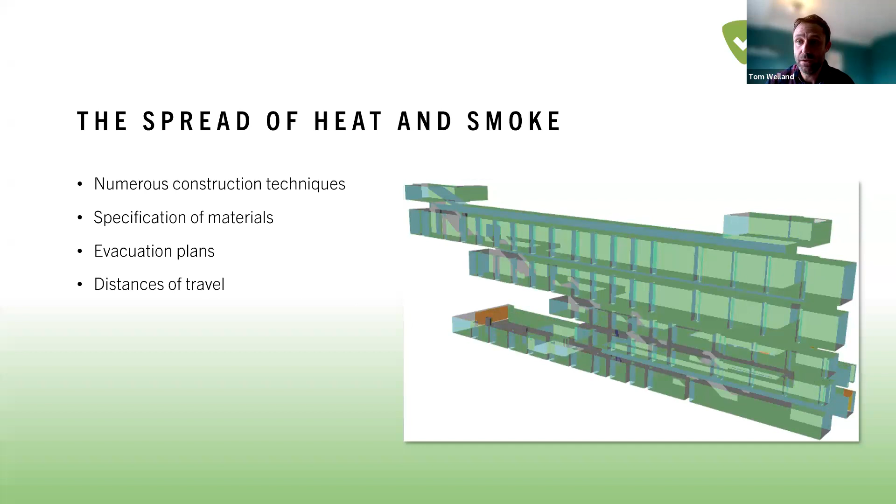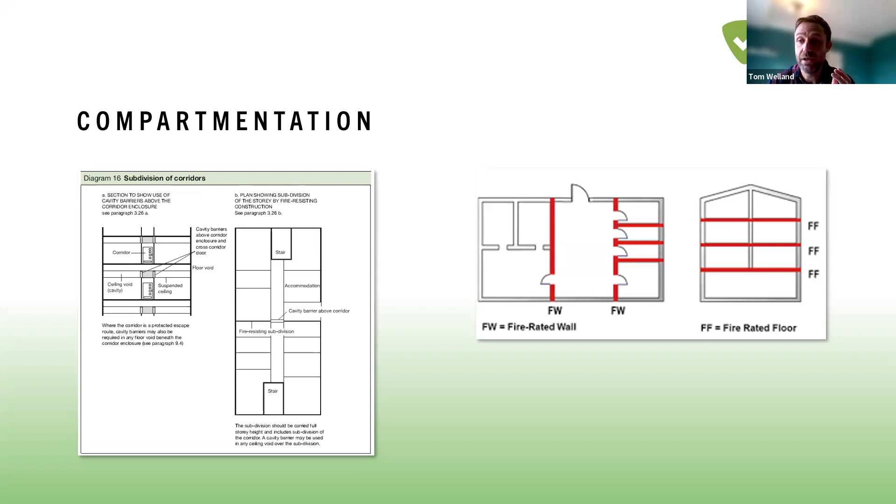We look at the compartmentation of the walls and floors, and it's built perfectly. So providing it's constructed well, using the right materials and the right quality of workmanship, the premises we're looking at should maintain effective means of escape. The egress should be safe, and people should be able to stay in their compartments for a period of time.

What stops the plan actually working? It's not men, I will say that. It's various people. Once a building's built, it becomes dangerous when people occupy it. So you might get an IT company, or a Sky person coming in and putting cables through the building, punching through compartment lines.

You might find various workmen, you might find damage to the building. This can all put holes inside compartmentation, so the spread of fire and smoke gets out, it goes away from the plan. So from your shoe boxes, they've all of a sudden got lots of holes in them. And that's what we're trying to mitigate against, that's what we're trying to think about.

So the biggest issue we've got, the biggest hole in those shoe boxes, is your fire doors. We need fire doors so we can get inside and out of our shoe boxes, but what we're primarily looking for is to keep those doors as effective as possible. So they are your shield.

It's a good illustration here - have a well-fitted fire door. You can see behind that door the absolute devastation that a fire's caused, but on the other side, the paint is still absolutely fine. The other side of that door is basically providing an effective means of escape. So people can walk past that door with a big fire raging behind it, and it's perfect.

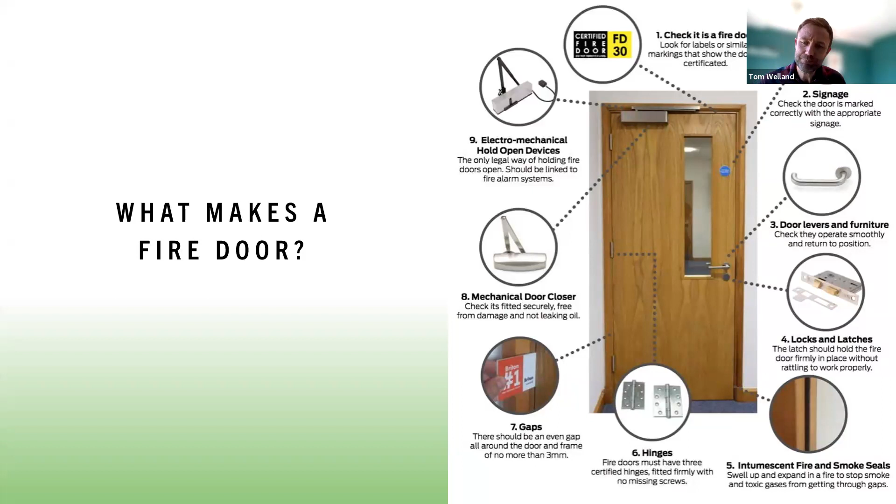The clever part of a fire door really is, as I said, the engineered design of a fire door. So when you look at a fire door and it looks lovely, the actual veneer, the wood on the outside, is the expensive part, I guess. That's what makes it look nice.

But inside, there are millions and millions of little splinters of wood which are held together by intermittent glue. That is your barrier. So when the veneer on the outside cracks and crumbles and goes away, that's not your barrier - it's the sandwich on the inside. That's what's protecting the occupants, that's what's protecting and keeping that means of escape, your shield against the fire.

And we must remember in blocks of flats, what we are actually trying to do is think that there's a fire in someone's flat and they've left the flat - does the door close behind them? That's your barrier. That's what we're trying to do, to make sure the other occupants of the building can walk past that flat that's on fire and they are safe for a period of time.

So what does the law say about this? The law, if we're talking just in England and Wales, is the Fire Safety Order. It requires that in a block of flats there are suitable fire precautions so the common parts are safe as a means of escape from fire.

Under Article 9 of the Fire Safety Order, a risk assessment shall identify fire doors and determine whether they adequately resist the spread of fire and smoke into or within the common parts. This is the actual article you'd be prosecuted under if you were contravening the law.

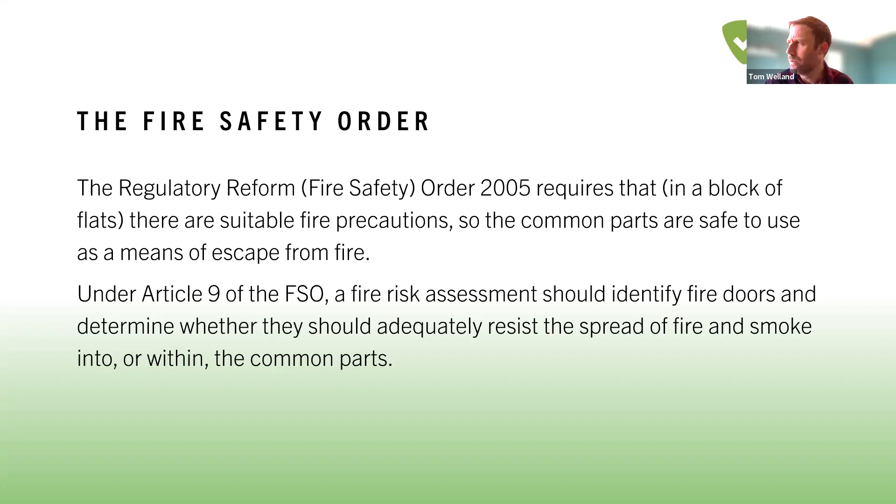It doesn't mean you have to have newly tested certificates and things like that. You have to put the case forward if you're deviating away from a British standard, but it doesn't mean you're breaking the law because you don't have all the components that you'd require if you were installing a modern, brand new fire door.

Following from Grenfell, we have the Fire Safety England Regulations. They came into force in January '23 and implement all of the recommendations made to the government in the Grenfell Tower Inquiry. This is where Regulation 10, the frequency of inspections, and requirements around fire doors come in, along with a bit more guidance around exactly what we've learned.

I think certainly in the UK we've been quite good at learning when we have a fire. If we go back to the Rose Park care home fire, lots of fire doors were evident in that. I think BRE made a whole-scale replica of that building and burnt it, and we learned a lot about that. An awful lot of money and time has been spent understanding how to make our premises safer when we unfortunately do have a fire.

So we're going to focus on Regulation 10. It applies to all blocks of flats that incorporate common parts, regardless of whether that block is purpose-built or a conversion. For the purpose of this legislation, flat entrance doors are included within the common parts.

That's important because the Fire Safety Order is a commercial law. So the flat entrance doors are deemed to be a common part, meaning you would come under commercial law.

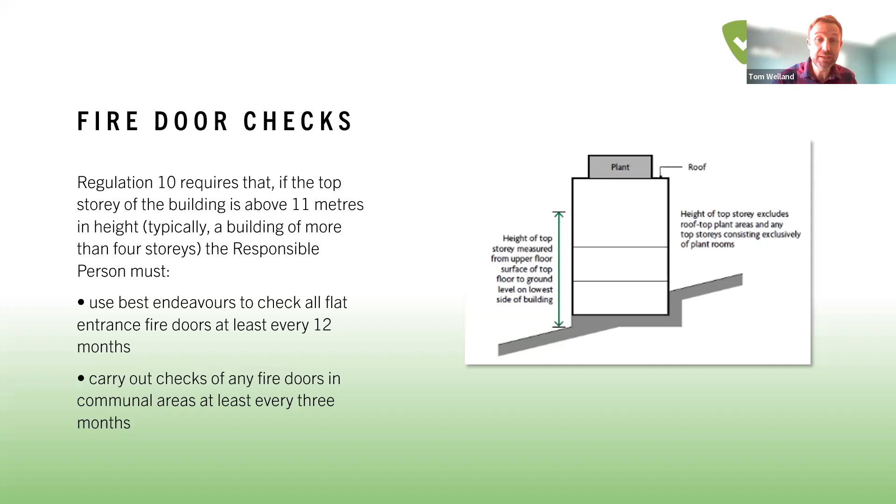So fire door checks, identification of issues in relation to the type of door and its intended fire resistance or resistance to fire and smoke is a matter for your fire risk assessment and compliance with the fire safety order. It is not a matter for Regulation 10 of the Fire Safety England Regulations 2022.

So it's important to put these because I think I'm always concerned about with legislation change, there is a massive economic growth in certain sectors. So you will all see, if you've been on LinkedIn, there's the massive resurgence of fire door inspectors and this industry, and telling you need to do that, it's dangerous, and it's ambulance chasing.

Yes, there is a greater requirement. Yes, companies will seek to get assistance in doing that. That's absolutely fine. But it's important to note what their scope, what their remit is actually there to do. It shouldn't be go through a building, find every single fault relating to an installation standard, and require remedials off the back of that.

I've also seen an awful lot of companies which are working alongside a remedial company. So it turns out your door inspector's been in and they've produced you a big report. It's all very scary and it's got fail written all over it. But rather handily, they can introduce you to another company who can put all that right. I'd really be concerned about that.

But I think the point I want to get across in this presentation is there has been no assessment of the risk. There's been an assessment based on a British standard around installation of fire doors. That's fine. Give that information back to your fire risk assessor. Understand what that risk is. Go back to your door assessor and say, okay, that's fine, we've found an issue, we've found a fault. What does that mean for life safety within the property? What does that mean for maintaining an effective means of escape? And it's not a case that you have to make every single building a prime perfect example.

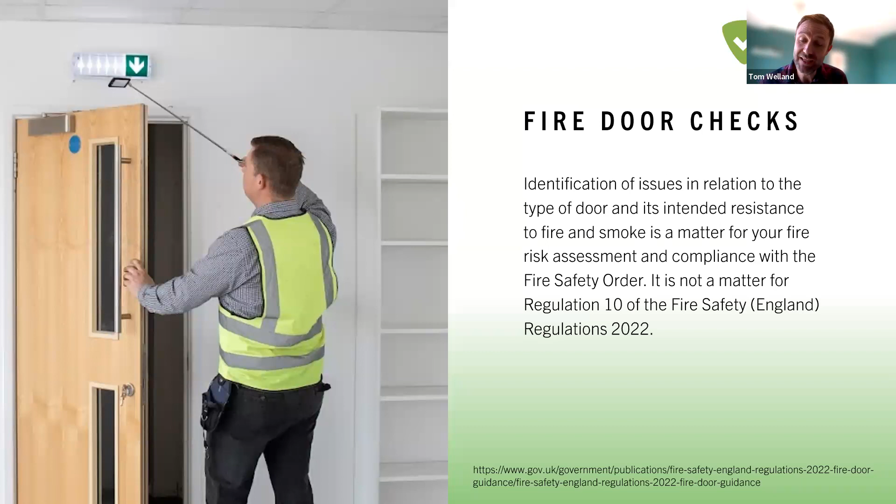If the fire safety order was all about every building being the safest it can possibly be, there'd be a massive push for sprinklers in every single block of flats. We're not going to take it that far. So it's important to note that not every issue you find must be remediated. There must be an assessment of that risk.

The types of fire door checks: we carry out something like a pre-occupation survey, which is where a developer—basically it's snagging list time. So before it's handed over to the eventual owner or the housing association, it's a pre-occupation survey. At that point, we really go to town on inspecting that fire door and making sure it's a perfect example of a brand new fire door installation.

You would carry out a fire door assessment as part of your annual fire risk assessment. You can carry out a non-destructive fire door assessment—that's perhaps where you feel you've got specific issues around the doors and want to have a look. That would be fairly detailed. You can take it to the next step, which would be a destructive fire door assessment, typically part of a Type 4 risk assessment.

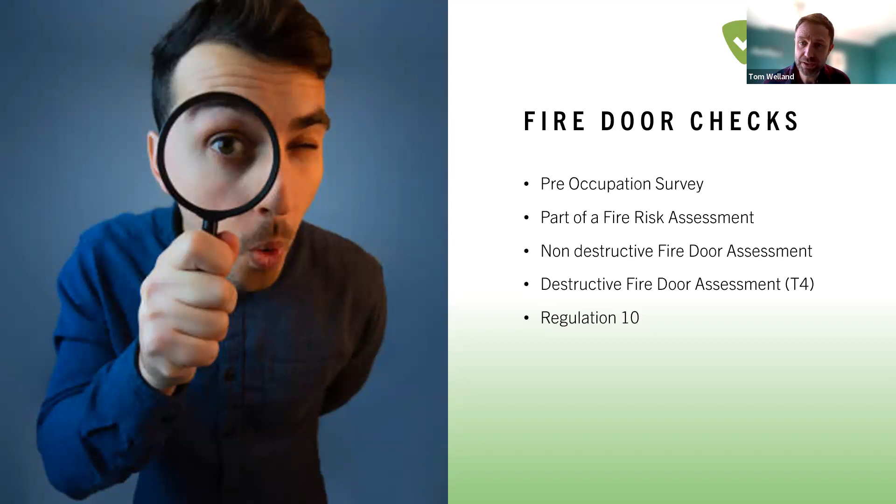That's where we would break off parts of the architrave and really go to town on the door. We've carried out some samples where we've removed doors and sent them away for further testing, as part of a Regulation 10 check. So as part of a Regulation 10 check, what should be being looked at?

Number one, does it close? If the door we're looking at is—in theory it's taken off and sent to a lab and we test it and it doesn't actually do 30 minutes anymore, it does 23 minutes—are you really going to lose any sleep over it because it's 23 minutes in a furnace? I don't know, it depends on the situation. It depends on the age, how agile the occupants are, where that fire door is in the building. But really, what I'm most concerned about is, does it close?

So is that door closer working like it's required to do? You want to ensure the self-closer is correctly installed, not broken or disengaged. Sometimes you'll see a little bit of fluid stain underneath it—that's hydraulic liquid leaking, and that's a good sign it's going to break after a while. Is it closing too fast? Is it closing too hard? These are things to look for the root cause.

If someone's disengaged that closer, there's a good chance it was just too strong for them. Most door closers these days come with adjustments—an adjustment for the swing speed, and an adjustment for the latching speed. So you can have the swing speed really quite slow and controlled. The latching speed, which is the last 15 degrees or so, should have more of a kick to it so it can overcome a latch.

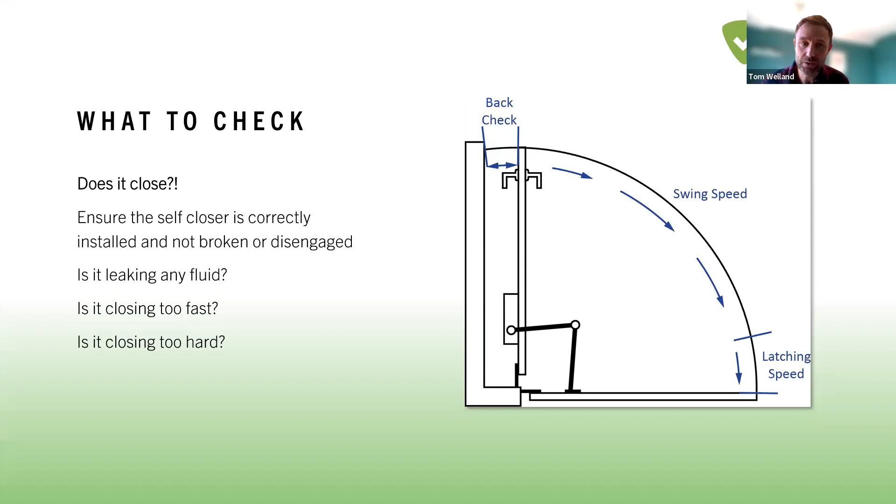Is there any damage to the door or the frame? If we go back to our example—well, actually, we've got the nice wood veneer on the outside and the intermittent glue—once we start getting holes like this, you're going to have problems. Your seal has some risks, and heat and smoke can get to the other side of that door and effectively can buckle that door.

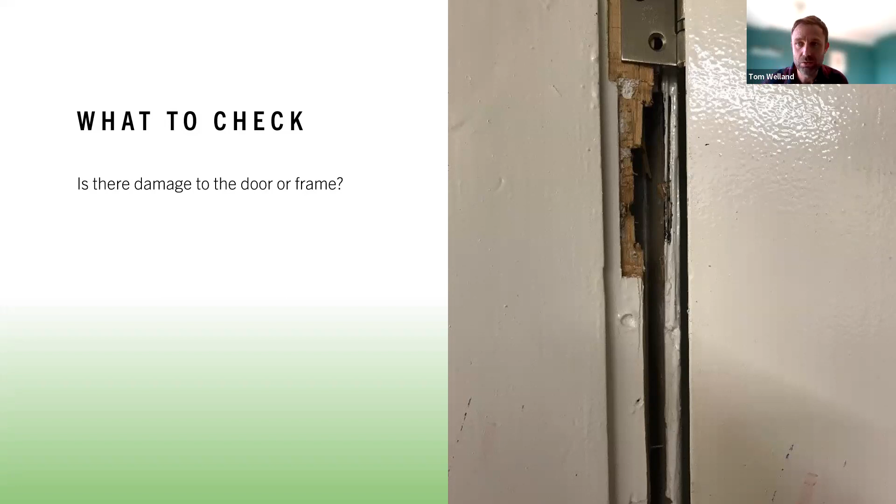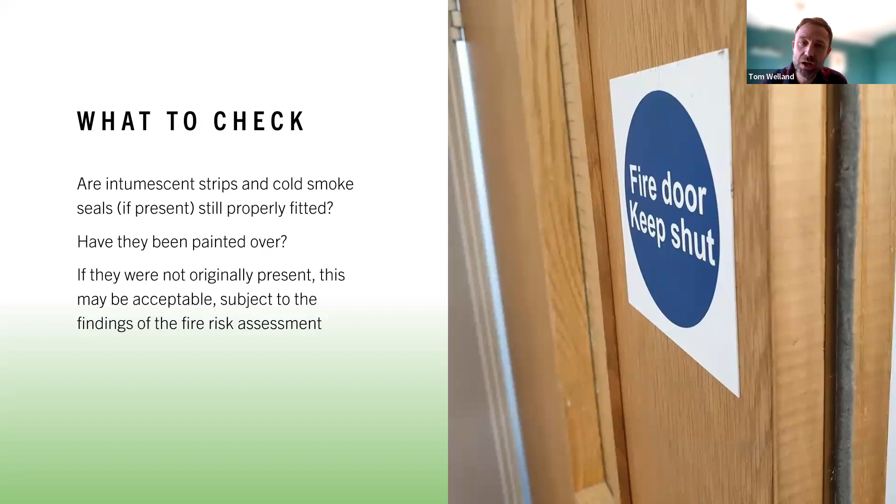Are intumescent strips and cold smoke seals properly fitted? Have they been painted over? That's quite a common one. If they were not originally present, this may be acceptable, subject to the findings of your fire risk assessment. And I will keep trying to bring us back to, what does the fire risk assessment say about this? A door assessment is a spot check, and you're assessing it against guidance—the guidance we're looking at is installation guidance. That fire door is not being installed properly. So we can gather all that evidence, and then there must be an assessment of the risk.

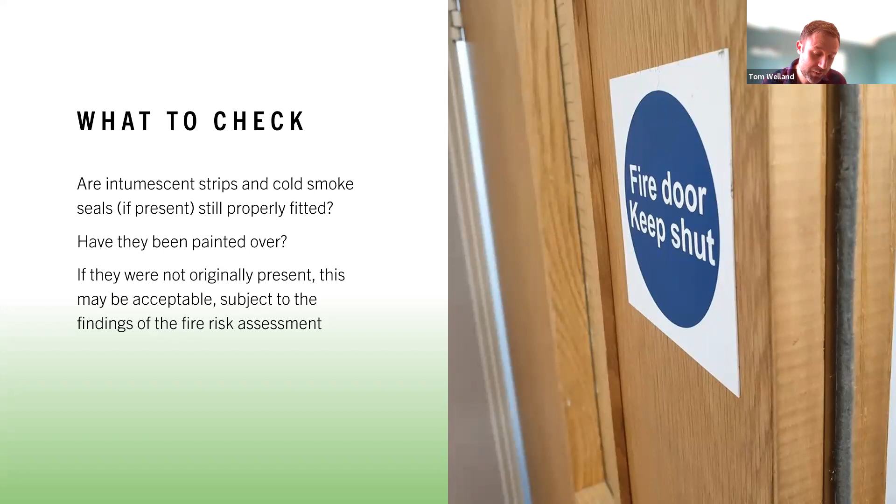Pass it back to the fire risk assessment.

Are the gaps excessive? The industry standard is that gap size should never be more than 4 mil, except at the bottom of a fire door, where the gap should be as small as practicable, while ensuring the door is unlikely to snag on the floor, even if it drops slightly on the hinges. Heat and smoke rise, so the top of the door is our main concern. Smoke can get underneath too, but how large is the block of flats, where is that door located, and how long will the means of escape remain tenable?

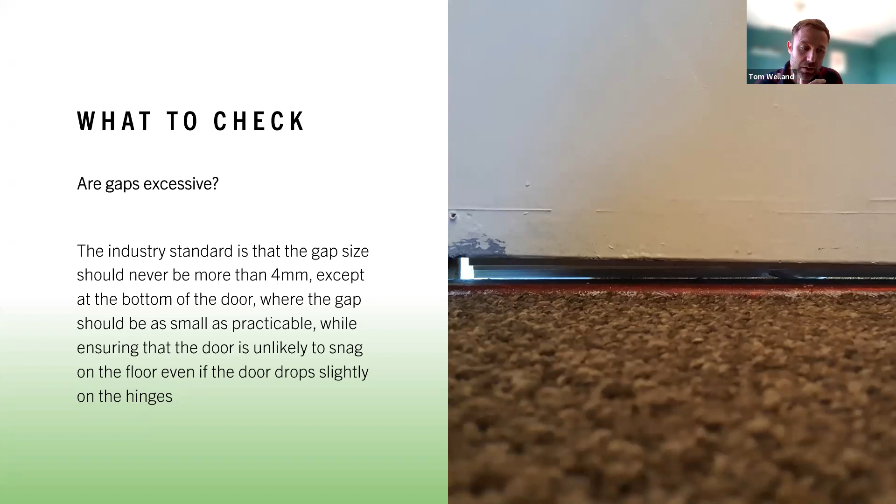I went off on a bit of a tangent, wondering what tolerances are required throughout the rest of the world. Looking at the threshold gap at the bottom of the door, there's a big difference in what countries actually require, even though these are the same fire doors. A lot of fire doors are made in Taiwan as blanks, then shipped all over the world and installed by installation companies, all required to do the same job.

In America, the threshold gap can be no more than 19 mil. Australia is 10 mil, Hong Kong 10 mil, New Zealand 10 to 25 mil, and Dubai or the UAE is 13 mil. Same humans, same buildings, yet the tolerances are really different. What we should actually be focused on is that 4 mil gap — that seems to be the common recurring theme around the edges and top of the door.

Hinges — are they in good working order, with no obvious defects? There should be three hinges, and they should be CE marked. Failure to have three hinges — what does the risk assessment say against that? If you're doing an installation, yes, you must have three hinges and they should be CE marked. But if a door in situ doesn't have three hinges, it doesn't mean you're breaking the law. It's against a code of practice, guidance, or British standard, but it doesn't mean you'd be prosecuted just for not having three hinges.

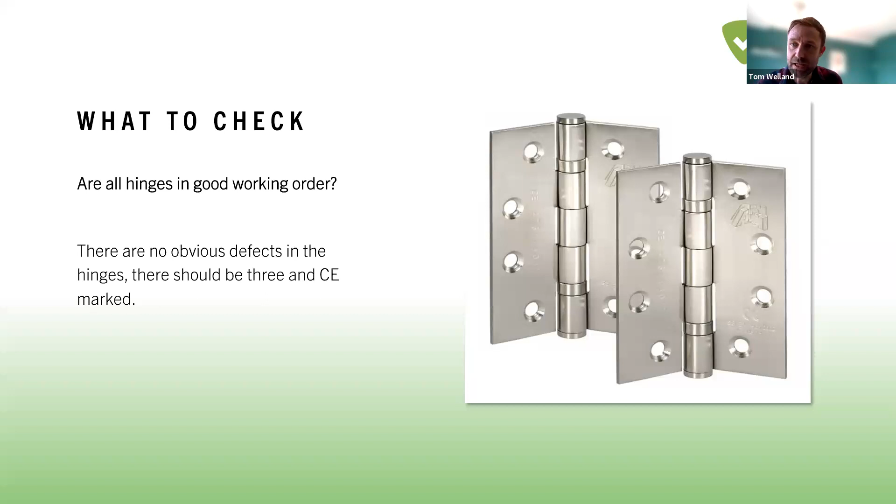Is that door maintaining an effective means of escape? Again, assess the risk that's in front of you.

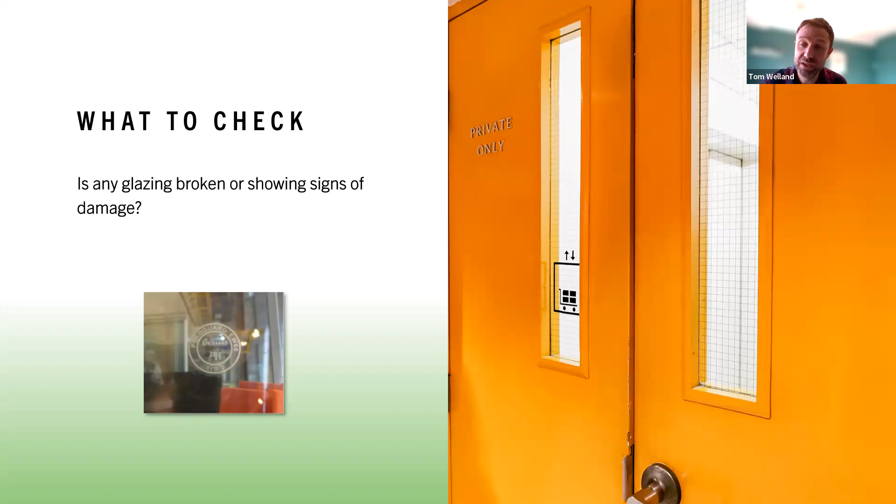Is the glazing broken or showing signs of damage? Georgian wire glass is easy to identify as fire resistant by the lines on it — a good indication the door was manufactured to be fire resistant. With clear glazing, you'll often see a sign, bottom left, giving a number that's easily Googleable, telling you the required level of fire resistance. Sometimes it's security glass, which has a limited but still present level of fire resistance.

Sometimes you'll also find TRADA plugs — little coloured plugs with arrows, which a lot of people call Christmas trees — that give information on the relevant fire resistance of the fire door.

What happens when you... Sorry, Adam, do you want to say? There's a couple of questions.

One about flat doors - a door is no longer compliant because the manufacturer has withdrawn it. I assume it's one of these composite doors. What would somebody do then, especially if the passive fire company that installed it is no longer accepting liability to remediate it?

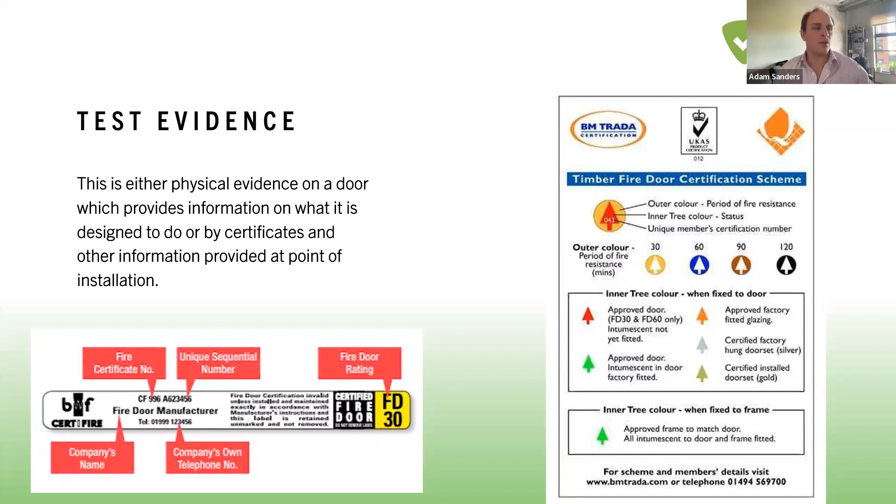And what about looking at threshold gaps? BS 8214 says 3 mil on a threshold gap for smoke control doors. Is it worth trying to explain to people the difference between just a fire door and a smoke control door, and why that 3 mil versus the 10 mil becomes important?

Yeah, so if we take it back to the actual design of the building and the smoke control - what we're looking for if there's a fire is what's happening with the smoke inside those buildings. So you'd have equipment like AOVs, automatic opening vents, which will lead the smoke through the building and out of the building.

So there are doors that also play a role in that, which is important to note - the fire risk assessor should be well aware of what that door's requirement is. So if there are any issues with that door, it heightens the need for remedial action. It places more importance on that door if it's part of a smoke control system. It's important that it's actually going to do its job when it's required to.

But you may find that a fire door assessor is looking at the fire door and seeing all the precautions and applying the point of guidance, but actually, are they aware of what that fire door is there to do? What's its role? I think it's important that...

There was a case a while ago where a certain company was prosecuted all around compartmentation around fire doors, but 2 of those doors that were cited weren't actually required to be fire doors. So effectively, when you're looking at gaps, things like that, it doesn't matter - you can have a big whacking great hole in it. But sometimes when there's construction, they just put fire doors in as many places as possible.

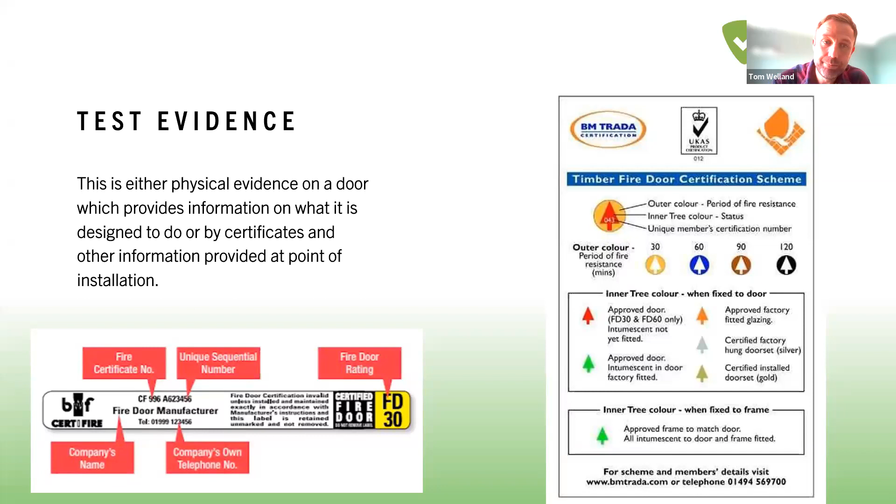Notional doors or nominal doors - this is generally an older type of door, which could have been in place for many years and met earlier standards for manufacture and test, but it doesn't display any fire test evidence. It's been there for such a long time.

If we would start asking the questions of, okay, where did you get it from? Who installed it? What evidence is there that it's fire resistant? There's nothing. So at that point, we need to analyze what's in front of us - so what's the thickness of that door?

That's a good indication that it's some form of fire resistant. If it has glazing in it, if it has the Georgian wire glass, that's a good indication that it has some level of fire resistance. Give it a good tap - does it sound fairly thick?

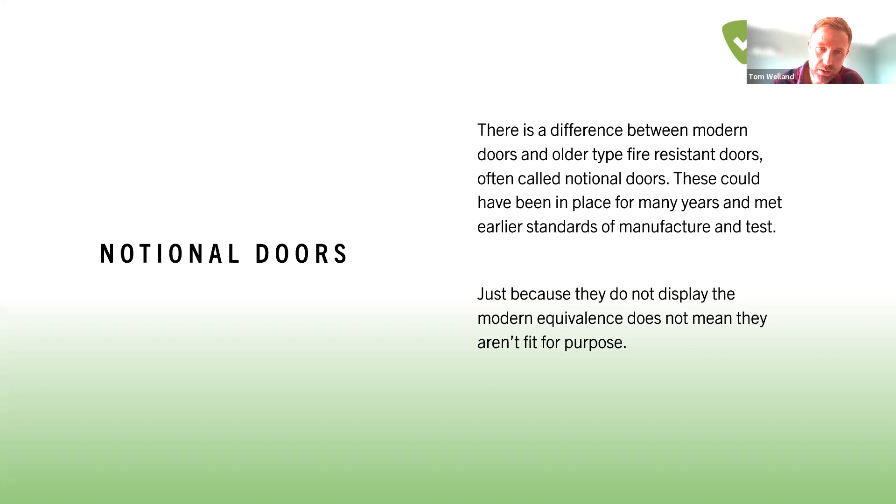If it's a very old door, like the one I mentioned earlier, solid oak, can a risk-assessed approach actually allow that door in situ? I'm always conscious that these are people's homes and we're not trying to make them look like a fire safety shop. So if you have properties which are older and more ornate, do we have to lose every part of the character of that building due to fire safety? Or can we actually look at it?

Is there any remedial action which could upgrade it? Putting on intumescent strips and cold smoke seals is a way of perhaps mitigating that risk. It doesn't mean the door just needs to be removed. Just because they don't display the modern equivalents does not mean they are not fit for purpose. This text here is not my words - it comes directly from British government guidance. So it's important to note this isn't me going off on a tangent, this is what's being told to us.

There's a couple of questions people have asked, especially around notional doors, in conversions or buildings that don't necessarily fall under the requirements of the Fire Safety England regs to have these door checks done. So if you have a building under 11 meters, do we need to keep doing these door checks? And if we come across notional doors, do we need to fit those strips and seals? And if a door surveyor has recommended strips and seals, should that work be done versus the recommendations of a risk assessor? So I haven't made that very clear - if you've got a door surveyor that said fit strips and seals to a notional door, should we be doing that? And what's the difference between a door surveyor recommending it and a risk assessor recommending it?

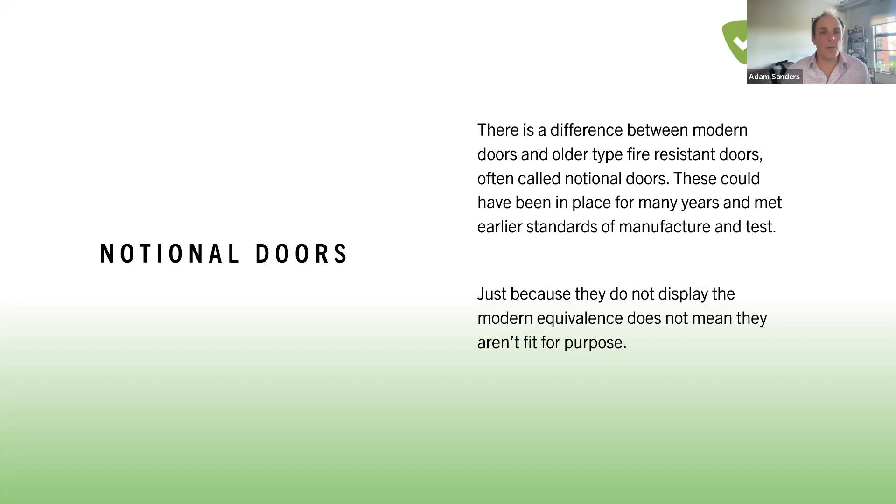It seems to me the red flag really is when you have a door survey with a whole load of notional communal fire doors, and a surveyor comes along and just says fit strips and seals to every single one of these doors without justification, versus maybe specific doors that might need that work done because there's a particular risk. Intermittent strips and cold smoke seals are a relatively low cost improvement to fire safety, so it's fairly easy for people to go, okay, we'll do it, because it's not a lot of money - we're not asking for sprinkler installation. On the face of it, it should improve safety, so we'll do it.

If you look at intumescent strips, the way they work is in a fire test they're installed on doors, and you've got that furnace heat hitting it, constant heat licking the door, which expands the material and it fills the gap around a fire door. Real life fires don't actually work like that, and intumescent strips will only work if they're all activated.

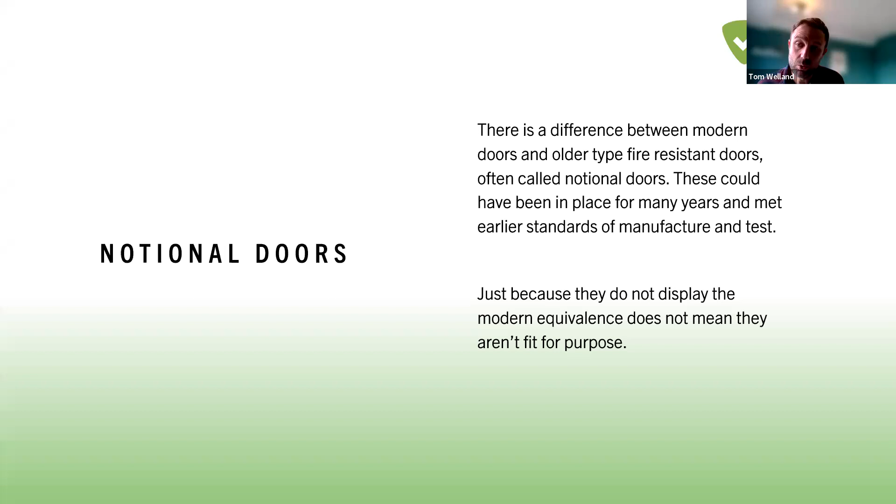So if you have a fire and perhaps the window's open, you can get a problem with constant heat and smoke hitting that door. There are plenty of real life fires where the evidence suggests the intumescent strips haven't actually activated as they should.

So we shouldn't be lulled into thinking that just because you've done that, they are perfect. It's not driving the risk down to a really low level just because you've done that.

I think it's a good bargaining tool if there is real doubt against the doors but you want to keep those doors in, or perhaps your budget is quite low - it's a good argument to say, put intumescent strips on. But to do it properly you need to take the doors off, route out the edges, put them back on, or install the intumescent strips and then re-hang the door.

Who's checking after the joiner's been in and done that? That's the other thing to remember - make sure someone's coming back in and confirming it's been done correctly. But we shouldn't be lulled into thinking that just because intumescent strips are on the door, they are solving all our problems - that we now have an effective means of escape. That doesn't necessarily mean that in all circumstances.

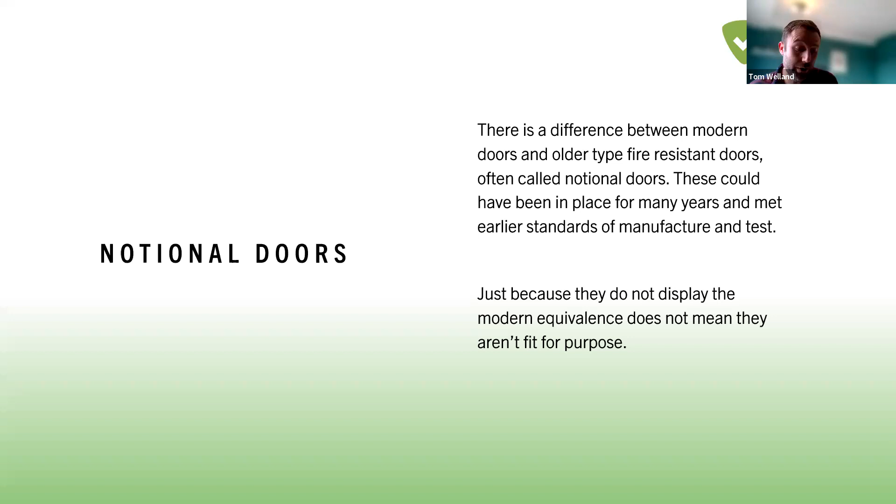So, new door sets compliant with building regulations: guidance in Approved Document B advises that flat entrance door sets should achieve 30+ minutes fire resistance. Older timber doors, manufactured or installed before current fire resistance test standards, may not have achieved this performance if tested to current standards. These doors should still be acceptable if they're in good condition without excessive gaps between the leaf and the frame. Again, these are not my words.

If you guys want to keep this, we can get a PDF copy sent out to people, but this is effectively distilling it. I think this is part of the problem - the market is seizing an opportunity to improve fire safety within blocks of flats, but also a lot of work is being carried out almost needlessly, just because of the fear of fire, so there's an opportunity to make money from it.

I quite wanted to stand on a bit of a soapbox and say, can we just actually look at what is the overall objective of this? The overall objective is that we have a higher frequency of checks.

So if there is damage to fire doors, it's picked up quicker. It doesn't mean to say that all of these fire doors require remedial action - that's not what is in the guidance, that's not what is meant by these checks. It means that if there is significant damage, it's picked up quicker, or if the door closer is disengaged. It doesn't mean let's all go off and remediate every flat entrance door there is - that's not what's required, that's not what the government is asking you to do.

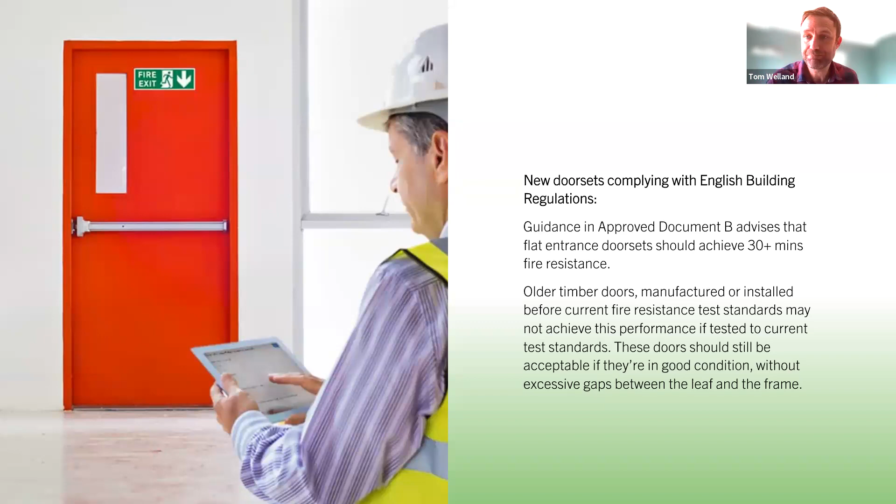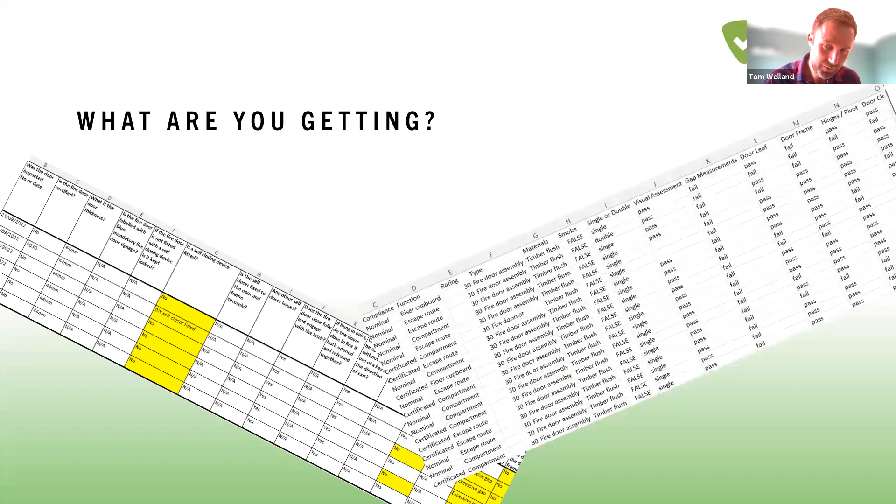So what are you getting at the end of your fire door assessment? These are two bona fide reports. I'm often sent reports and asked, what do you think of this? What's it actually telling you? Is it passing or is it failing? Passing or failing what? The law isn't a pass or a fail.

I think with assessments like this, it's very hard to determine - there is no appraisal, there's no assessment of the risk. It's a very binary approach, which is fine if you're using that to collate information - here's all the information we've got. Okay, then where's your assessment of the risk?

So it would fail an installation standard if we're installing the door today - well, that's okay, every notional door would fail. But what are you actually telling me? Where is this guidance pointing? It shouldn't just be, here we go, it's failed. Language like that is very emotive, and it's not telling the responsible person anything. It's actually driving them into going, oh Christ, I've got to do something about that. Where is the commentary? Where's the assessment of that risk?

I think it's really important to push back and ask questions. People are paying an awful lot of money for door inspections, so there should be an assessment of that risk. This data should almost just be for them, coming down to: we've checked all these doors, these doors were in a category we're okay with, that data is safe. However, these doors, we find there's issues because of these reasons.

We don't think it's maintaining an effective means of escape because of this. So at this point, these are bona fide headlines - three quarters of fire door inspections fail. If three quarters of fire doors are failing inspections, doesn't that mean we're very likely applying the wrong level of standards? If the MOT checks all of a sudden changed and three quarters of our cars failed, I think we'd look at it and go, well, perhaps we're applying the wrong methodology.

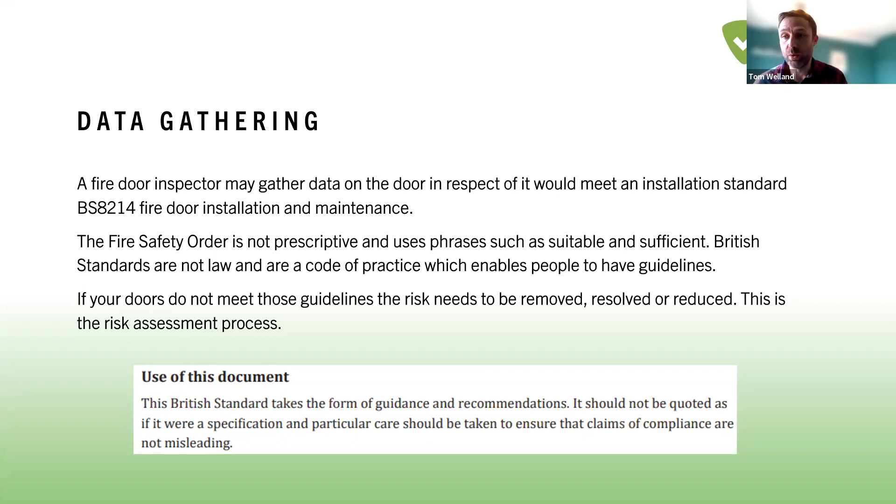A British standard, like I said, is a point of guidance, a point of reference. And if your door assessor is blindly applying it like it's the law, they're wrong. They can use it to inform their decisions, inform their guidance to you, but it is not a pass or fail based on an installation standard - unless they are brand new installed doors, and at that point you would use that standard to the nth degree.

So whilst door surveyors will survey a door to installation standards, the British standard doesn't have much say on the re-inspection other than to check for damage and excessive bowing or deformation. That's effectively where it comes down to - that's what the British standard says in terms of, when you go and look at it, check what's happening. Is there any structural damage? Is there excessive bowing or deformation?

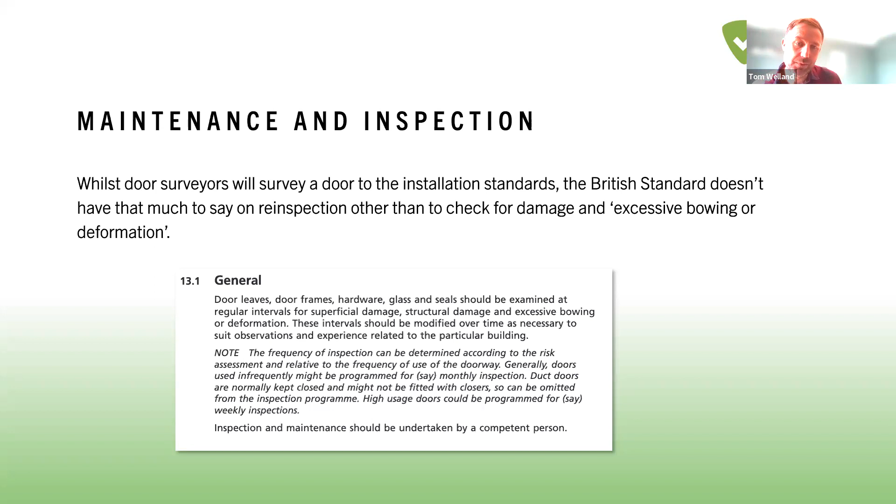Really a door should be put in and it should last a decent period of time - I think it's around 15 years. I did ask some door manufacturers a while ago. It all depends on the type of door closer that's been put in, whether they have fire door retainers, the heat of the building, and all these types of things. But doors are living, breathing things, so they can warp, they can bow - those are the things we're concerned about.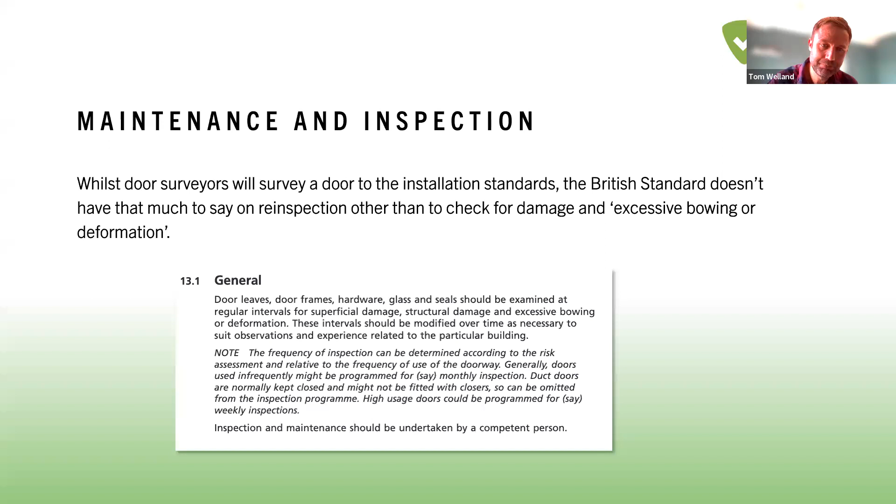So what then should happen? Gather the information relating to the testing and the state of the door, and provide an assessment of the risk. Get your data gathering done. I'm not saying all that data isn't important and we should go off on a tangent and do a big holistic appraisal - that's not what I'm saying. Gather that information and then make an assessment of the risk that's in front of you.

Consult with your fire risk assessor if it's not the same competent person. Decide between all of you what is suitable in the circumstances of the case. If remedial action is required, use third-party accredited companies, but also address the root cause of the issue.

Like when I said earlier about self-closers, there's no point just going, well, we've put the arm back on, there we go, the problem's gone away. The problem is the door's too heavy for the occupant, and they're going to end up doing that again. Or perhaps in that block, people are sick and tired of those doors slamming - can the door closer be adjusted? That's the problem. Then record all the actions and data gathered.

So when you do a re-inspection, is that all still applicable? Does it still provide the job that I need it to do? Adam, do you want to talk a little bit more about that?

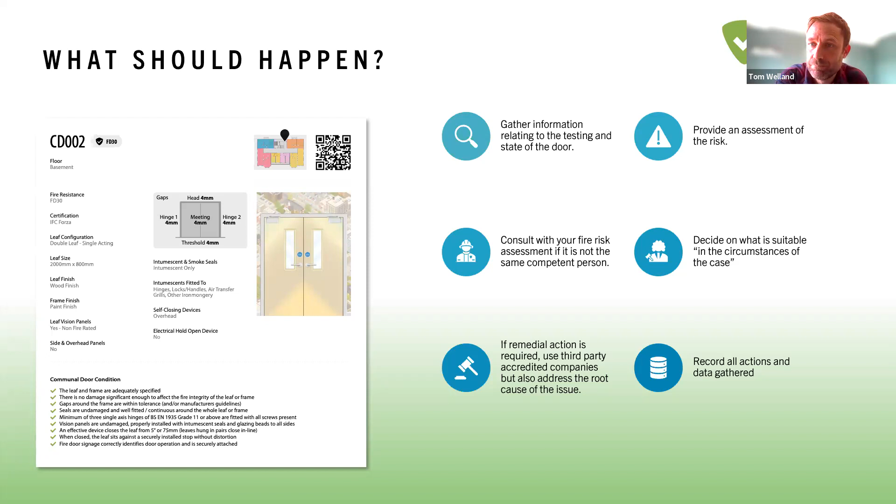Cool, I think it can get quite tricky at that point. Yeah, and I think a lot of the time, if the door is certified and tested, it's on the door - there are plugs on the door as well as the labels. I think from a technical perspective, we've covered pretty much everything. You've got one more slide, haven't you?

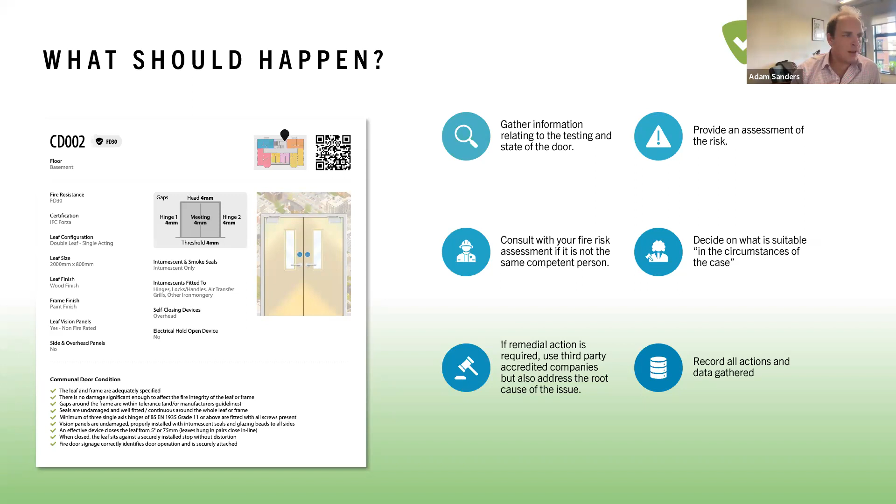Yeah, final thoughts. So I'll give final thoughts: changes in legislation will not only bring about improvement in fire safety, but it also brings huge economic growth in the fire door sector.

And I'm making this point as a bona fide person who can assess fire doors, so there is a benefit to me having this change in legislation. But I want to make people aware, to avoid so-called ambulance chasers - is your assessor independent in their thoughts, or are they affiliated to another company that would very much like the remedial action work? I think you should always be wary of them. If you get a company that comes in that also tests, maintains, installs, and provides equipment for fire doors, and they're coming in to check for faults that they would like to make money on putting right - beware.

Not every company is like that, but I'd just have a bit of thought about the people coming in to do those assessments and what's in it for them if they find remedial action. If they have a partner company that can put these things right, that's not necessarily a bad thing—because an assessment of the door should be backed up by your appraisal, your risk assessment of that door.

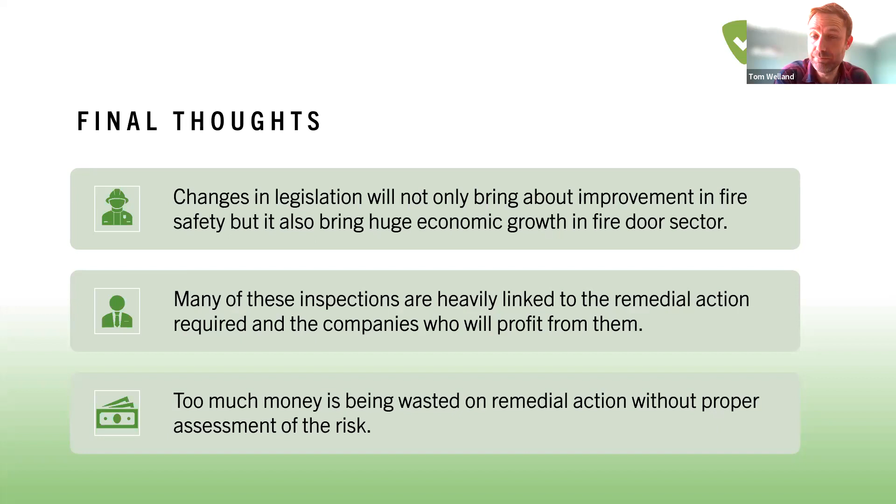This is the big question—getting people to ask those questions. We're under a bit of pressure, if you could just skip to that next slide.

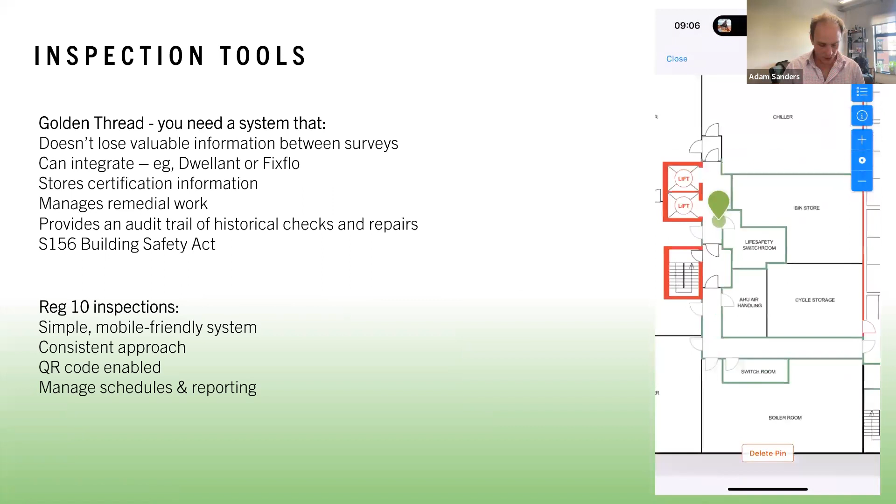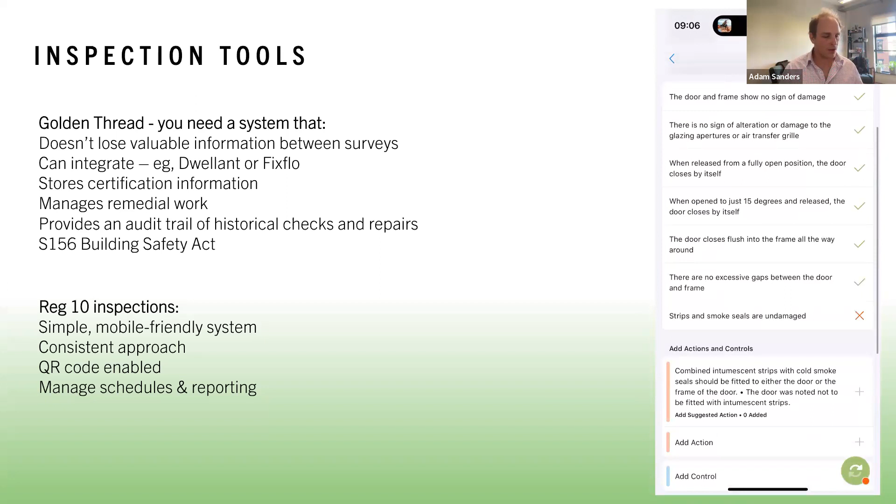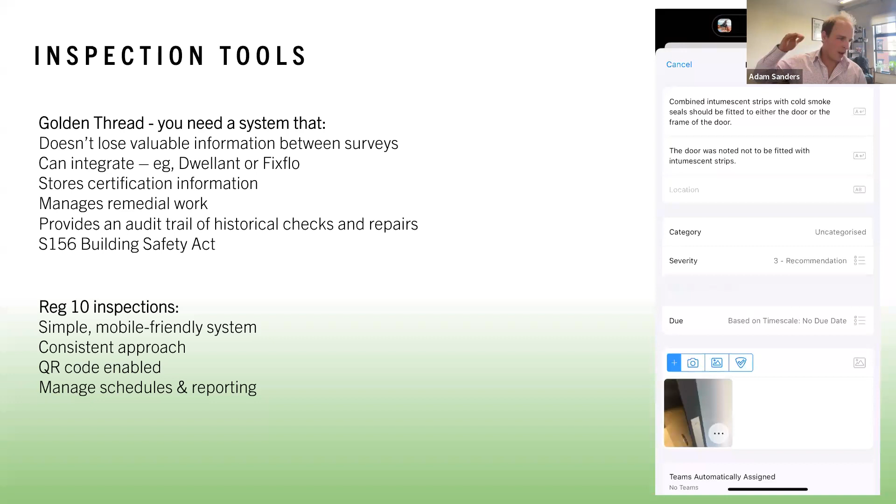Everybody's here to hear about doors, not a sales pitch for RiskBase, I get that. But I just want to spend two minutes covering this—make sure you put in a system that stores information about the doors. You're spending a lot of money on a door survey. If you're paying 15, 20, 30 quid for each communal door you're surveying, what you don't want is that information getting stuck in a PDF on a shared drive. You need that in a database so that for each door you can say, look, this is a BM Trada certified door installed by this person or organization, and it's had a door survey—I've had a proportion of the architraves off, I know this is installed to standard.

And then you've done your quarterly inspections, your quarterly Fire Safety England checks. When those raise remedial work, that's in an audit trail. If you keep putting that in different spreadsheets and PDFs, and copying and pasting into whatever your property management system is, you're just not going to effectively comply with the Building Safety Act—which is a much bigger piece of legislation to get prosecuted under than the Fire Safety England regulations, which are much simpler. So try not to deal with it piecemeal—really look at implementing management systems that make your life easier. And that's not just about making your life easier—if you have a management system, it'll be much cheaper and much easier to comply.

Section 156 of the Building Safety Act, which amends the Fire Safety Order, requires you to share fire precautions about a building and key risks with residents. That's not just leaseholders—that's residents, tenants, anybody aged 16 or over.

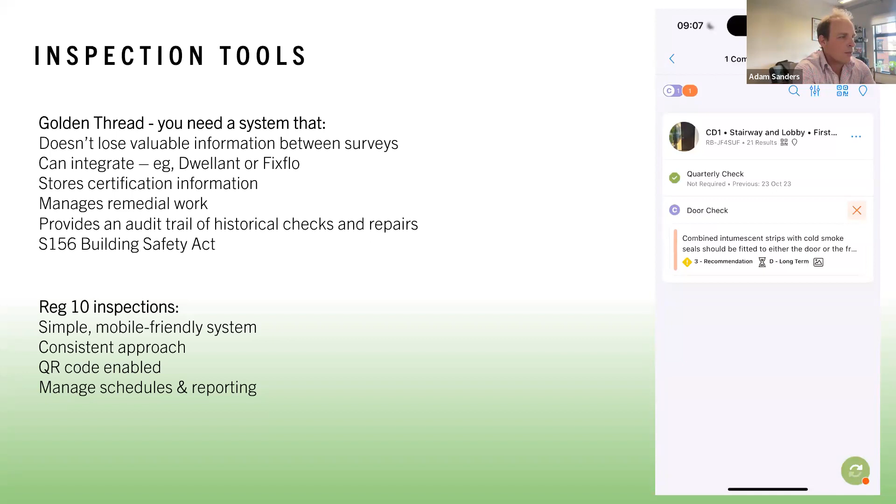Sylvia's got a good question about letterboxes. Ours were installed in the 70s. We've resisted having them all changed because we understand these would be making adaptations to the doors, which would originally have been compliant as fire doors in the 70s.

It's a difficult one because you're talking about letterboxes installed some 40 odd years ago. You would have to make a pretty strong argument that you're still comfortable those letterboxes are appropriate in the circumstances. I think there's probably ways, because if the idea is that we're keeping letterboxes for aesthetics, there's probably companies that can provide remedial action, so perhaps the intumescents could be changed but the actual face of the letterbox could remain the same.

If it's about cost, it really does depend again on the circumstances of the case. How old is that block? How tall is it? How is it constructed? What's the age and mobility of the residents? All of these things play into the decision. It's difficult to say. I appreciate some questions will come up that are, what about mine? It's really difficult without knowing the true circumstance of the case, but there are ways it could be approached.